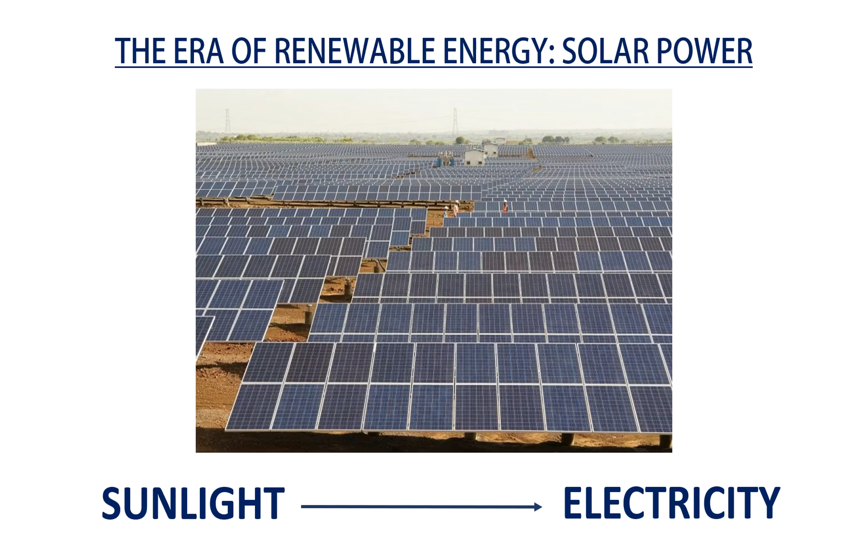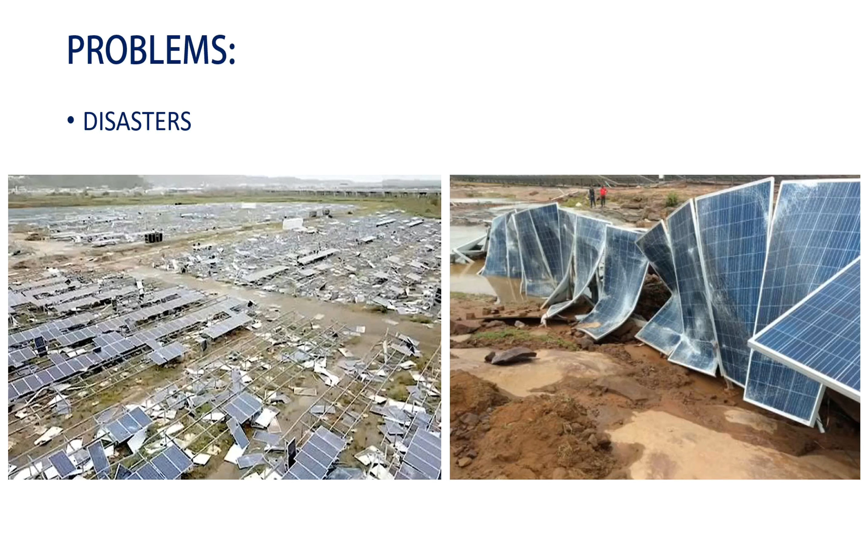We know that this is the era of renewable energy and solar energy plays a major part of it, where we convert solar energy into electricity. But there are some problems associated with this conventional process, like huge land requirements for solar power plant setup. Then there are disasters like cyclones, floods, and heavy rainfall that often destroy solar panels and cause huge loss. Also, we have to regularly clean the surface of solar panels, otherwise it will block the sunlight.

And even if we neglect this problem for a minute, still around 200 million people in India are unable to access electricity. And this is not only in India. So we have to adopt some other techniques to use renewable resources with better feasibility as well as more power efficiency. So is there any other option? Yes, we have. And the answer is outer atmosphere.

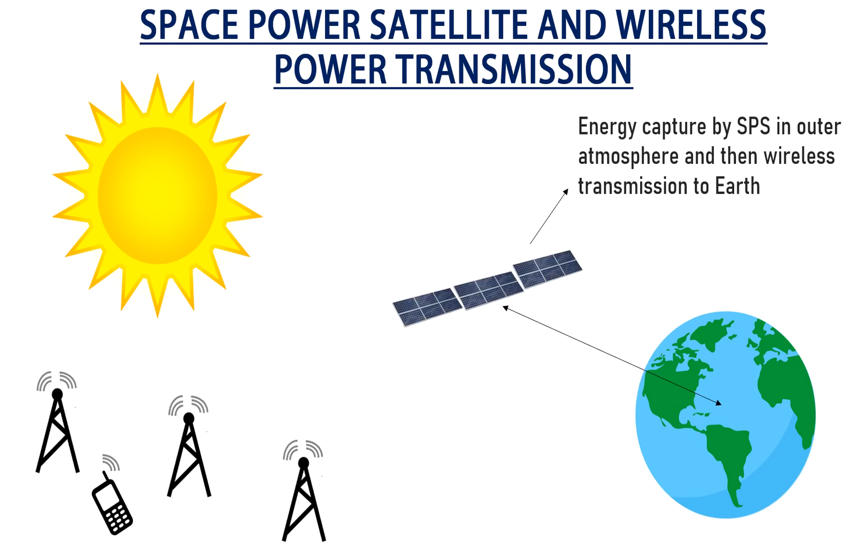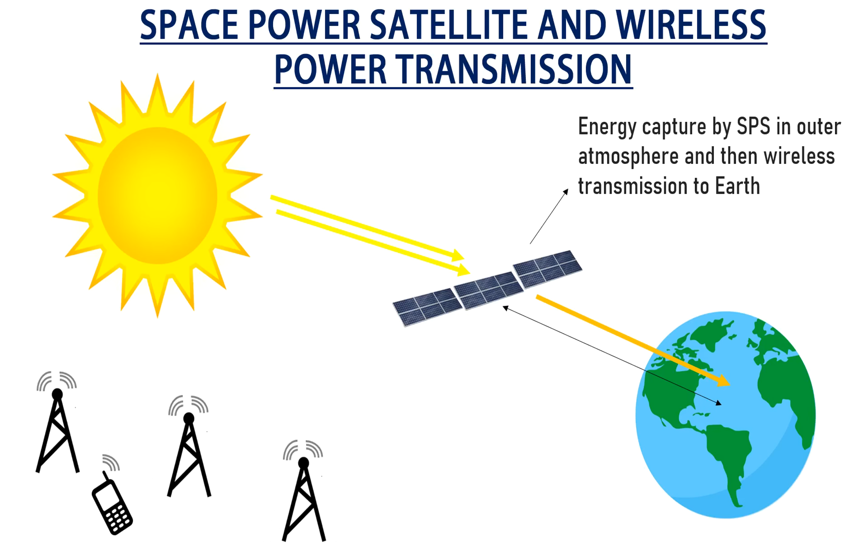So what we are going to do is install solar panels not on land but in the atmosphere and in larger numbers, because in the atmosphere we have large space. Then we will capture the solar energy, convert it into microwave signals, and redirect this energy back to earth wirelessly. It's just like how our mobile network works. And this is the overall concept of SPS-WPT, that is space power satellite and wireless power transmission.

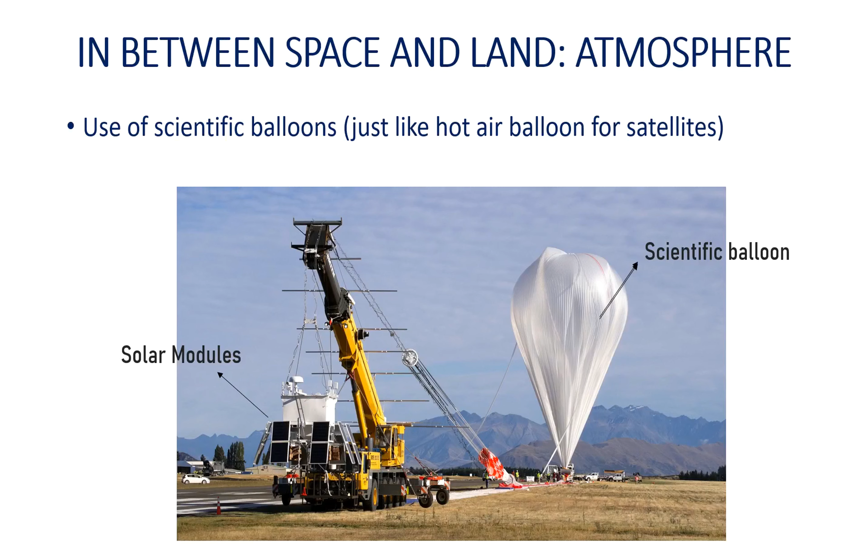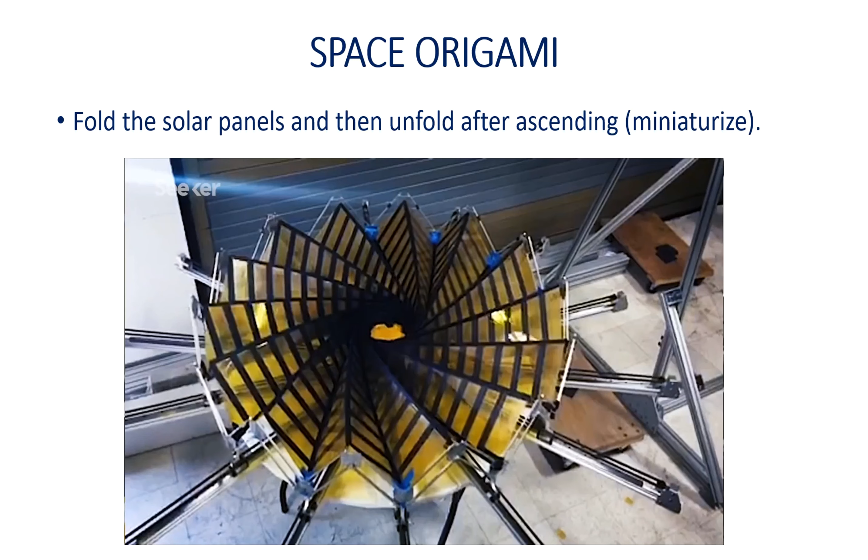But we can't simply put these SPS modules in the outer atmosphere, so we will use a scientific balloon to hold them. It's just like a hot air balloon for carrying a satellite. Now we can't launch these SPS modules with large solar panels from land, so we will use the concept of space origami: we will fold the solar panels, and after launching we will unfold them, as shown in this video.

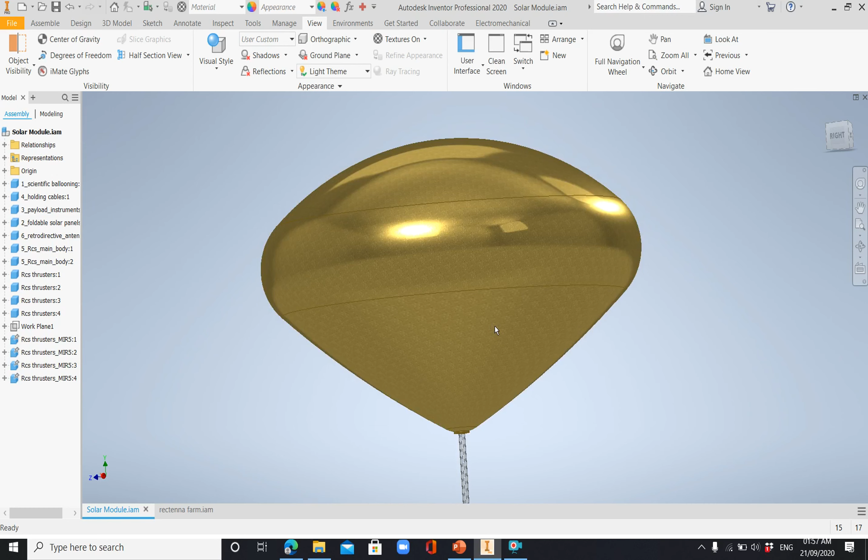So based on some information, I have tried to design the SPS-WPT module. In this design you can clearly see this is a scientific balloon covered with MLI coating, that is multi-layer insulation coating, to protect the balloon from outer radiation. Then we have a parachute to protect the SPS module in emergency situations; in some extreme cases if the balloon explodes, the SPS module will get separated and the parachute will open.

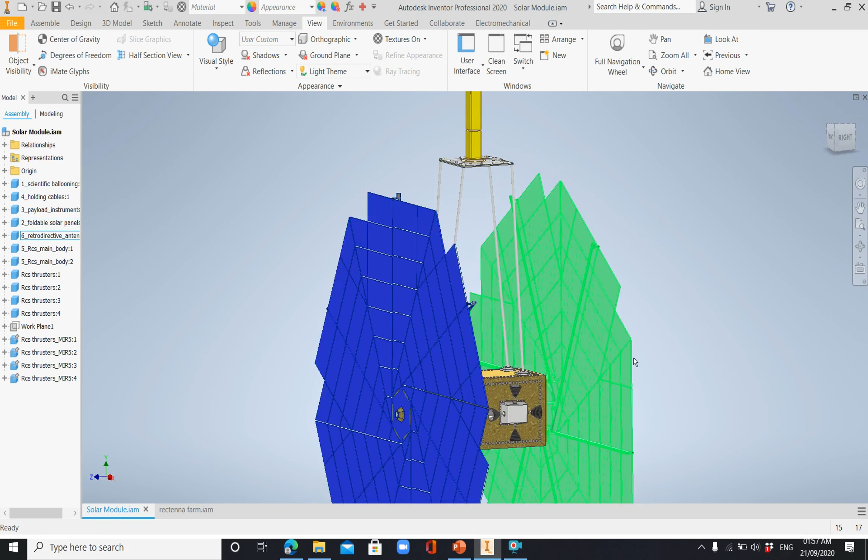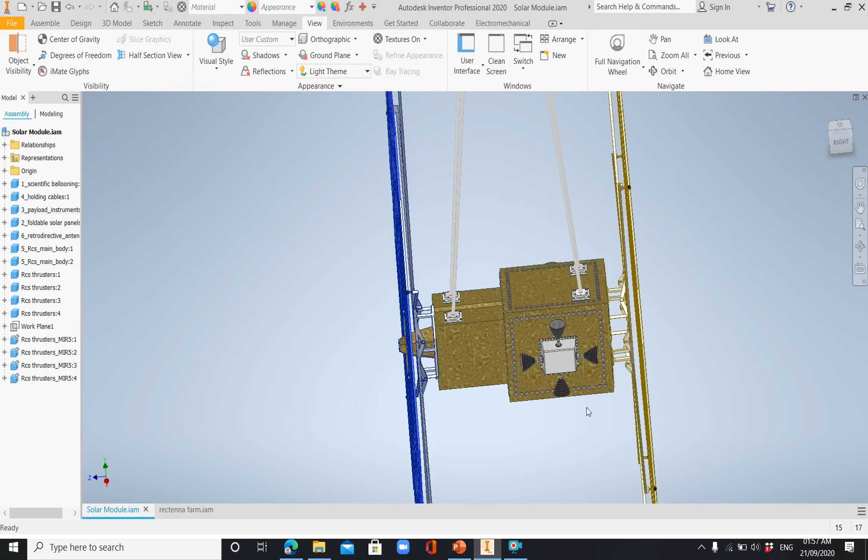And then we have large foldable solar panels which will capture the energy from sunlight, and if there are some sensors they will be installed here. And there are some RCS thrusters which will help in precisely orienting the solar panels toward the sunlight to capture the energy more efficiently. Then we will convert all the energy into microwave signals and transmit this energy back to earth with the help of this antenna installed with the SPS module.

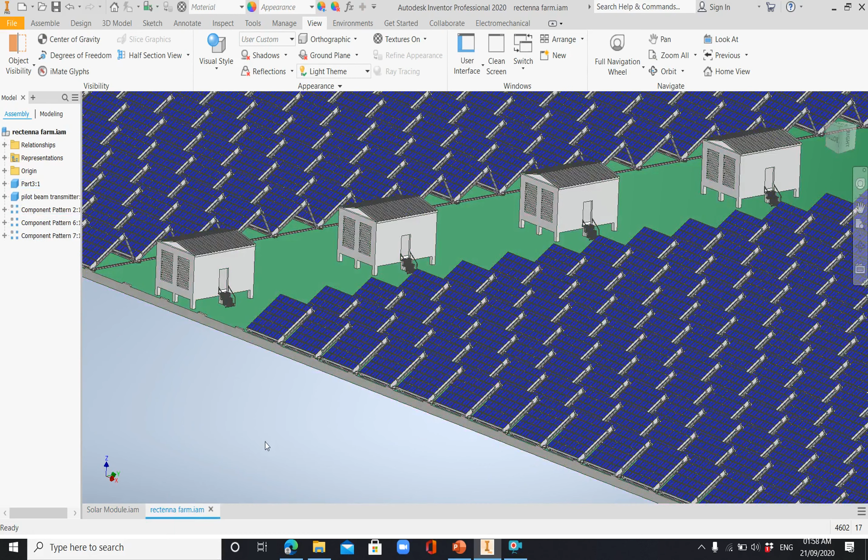The whole energy will be transmitted to the earth and captured by this array of antennas, and then we will convert this energy and transfer it to the distribution units. So this is the overall concept of SPS-WPT modules. With the help of this new SPS-WPT concept, there will be less land requirement, and the land required will be only for installing antennas.

Then we will have high power efficiency because there is more solar energy in space or in the outer atmosphere than on earth, because no scattering and absorption of sunlight takes place in the outer atmosphere. Also, we are able to use less than 5% of solar energy nowadays, but with the help of SPS-WPT modules we will be able to capture more energy.

Then it will be disaster free and it can serve as a new source of clean energy. Also, no cleaning is required, because in the outer atmosphere no climatic change takes place, so there is no atmospheric change, hence no cleaning of dust is required. And after all, it will be cost efficient.